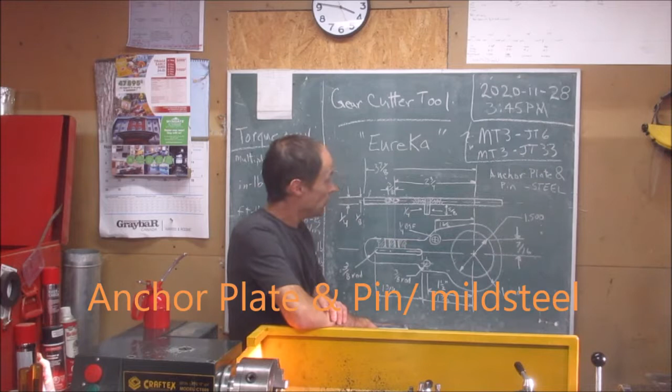Completed the ring, the retaining ring. Next is going to be the anchor plate and pin. They're made out of mild steel. Okay,

and this is a top view of this. Okay, and here there's going to be 2 set screws, right? And this is the pin, the pin steel, the pin, right here. And if you follow it down, it's right here.

Okay, it's a 1/4 inch in diameter, and it's 5/8 plus a 1/4. It's a press fit. Okay, so I'm probably either going to make it bang on or 1 thou interference fit, and then I'm going to press it in my press.

This is 1.5, and they got precision down to the thousandths of an inch on the picture. So this is going to be what the retainer ring we made is going to be holding in place against. In back here, you're going to see the ratcheting system with the 12 cogs on it, or the 12 notches. Okay?

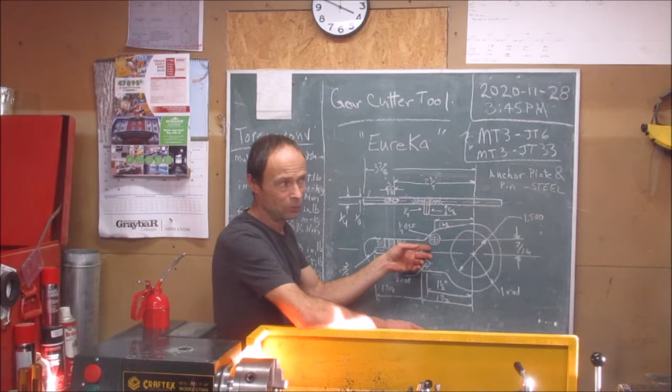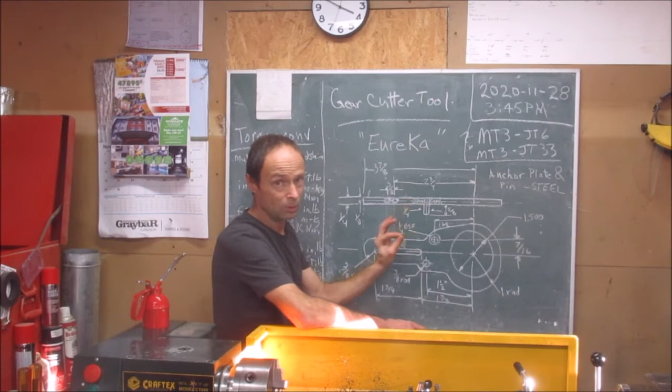Because fine gives you more gripping power, not necessarily stronger, but more gripping power, and more control over how much torque you would put. Like a 1/4 of a turn on a fine thread and a 1/4 of a turn on the coarse thread, you might be talking 10-20 thou difference of compression. So you're better off with a fine thread if you can do it.

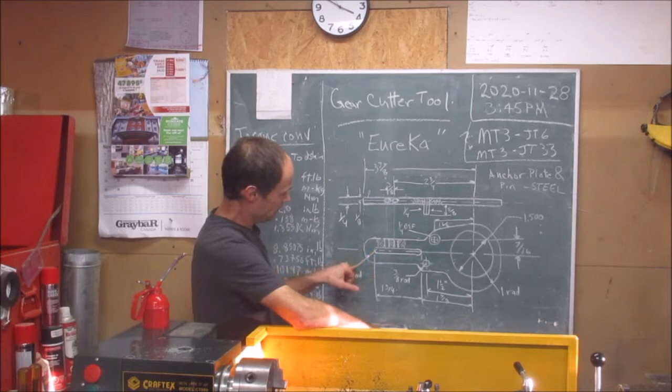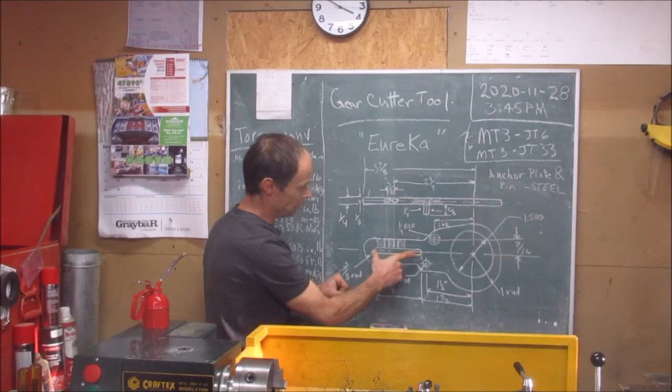This slot here, I don't have a measurement for it. I know that the radius from the center of that slot is 3/8. From the center of this, 1 7/8. To the pin, 1 1/2, and from the end of the 1 7/8, you have 1 3/4. That's the total length of that slot. But I have no idea what the width is. I'm going to check that out.

It's a 1/4 of an inch. Okay. So from here to here, one 1/4 of an inch. So let's get started.

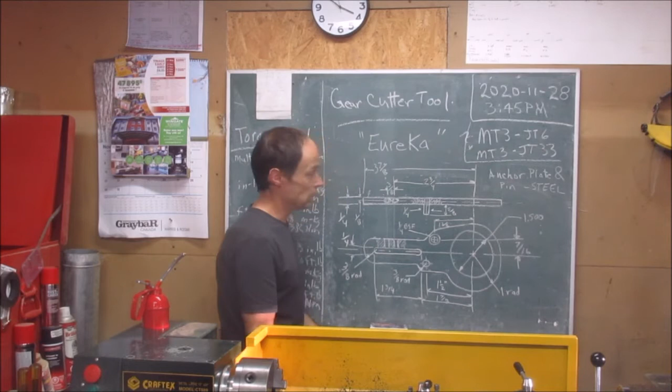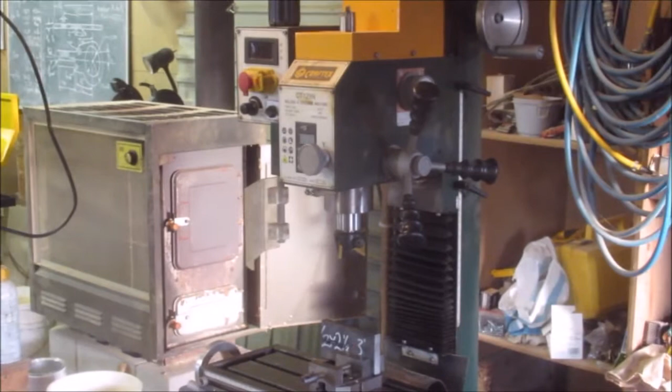So I've already cut from a piece of stock I had, which is 1/2 inch thick by 2 1/4. I cut that a little bit longer, around 5 inches long, but I have to take some off the height to bring it down to 2 inches, because my jaws on my vise only go up to 2 inches. That's the maximum they have, or 2 1/10. Okay, so I'm going to slice some off the top and some off the bottom. Then I'm going to be taking some off the thickness, bringing it down to 1/4 inch.

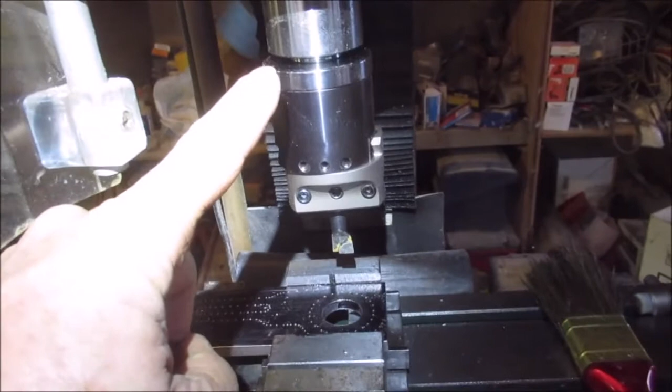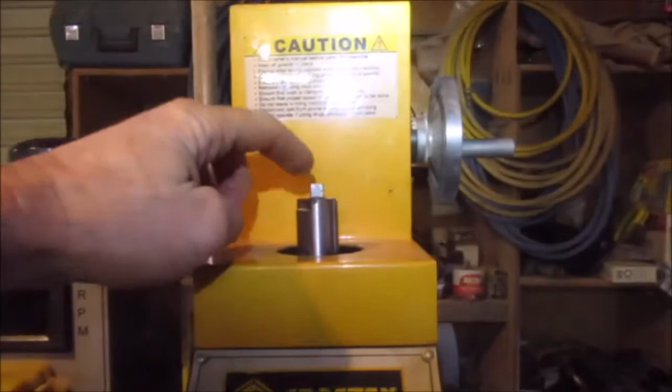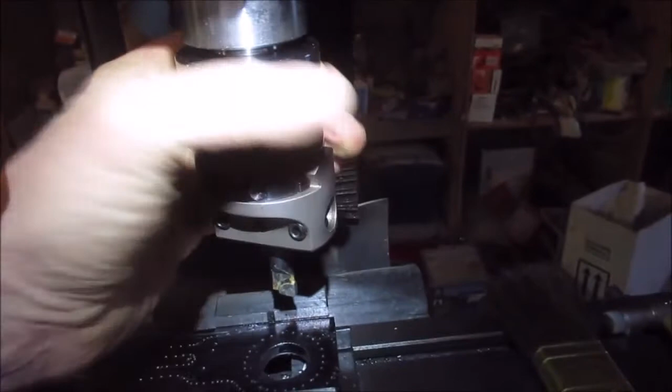So I finally got my boring bar in here, and the problem I was having was the drawbar would bottom out on top of the arbor before I could actually tighten up the drawbar. So I had to remove some material off the drawbar. I removed maybe 20 thousandths, a little bit more. It was just borderline, but it wasn't tight. At some points I could start spinning this around and the quill would stay still.

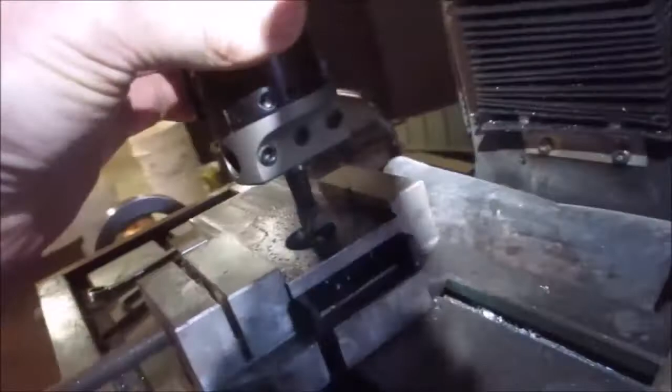Okay, so what you want to do is tighten these slightly. These actually control the slack in the dovetail. Your adjustment is over here, and it says 1 division is 1 thou. So if you lower your bar, like when I don't have a power feed on this machine, I'm gonna have to bring it down by hand on the micro adjustment.

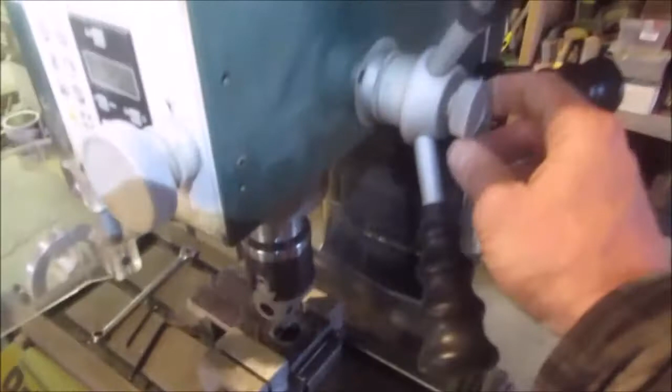And on this one, every division is 1/1000th of an inch. Same scenario. So you got to tighten this down, and I'm going to feed down to where I'm far enough, and then I'm just going to keep on tightening this screw till I actually get a scratch mark on the back side of this.

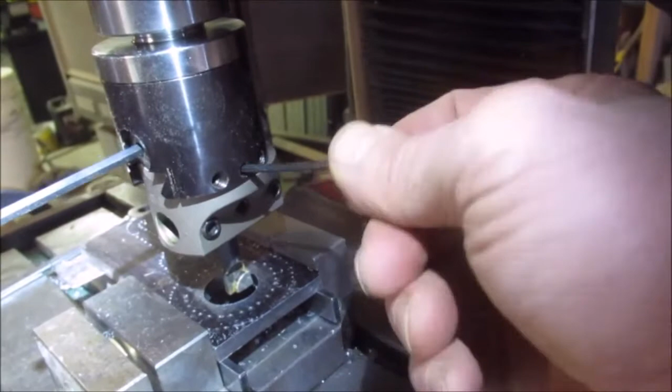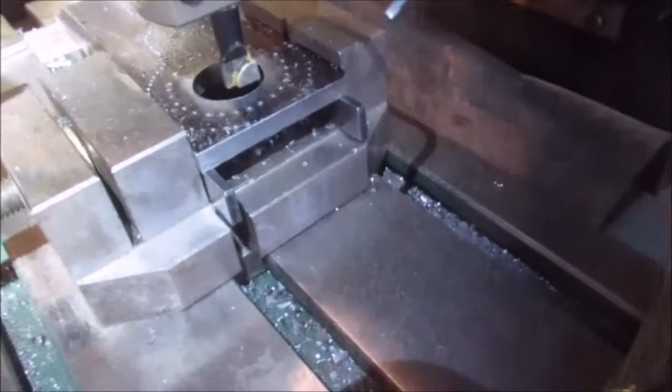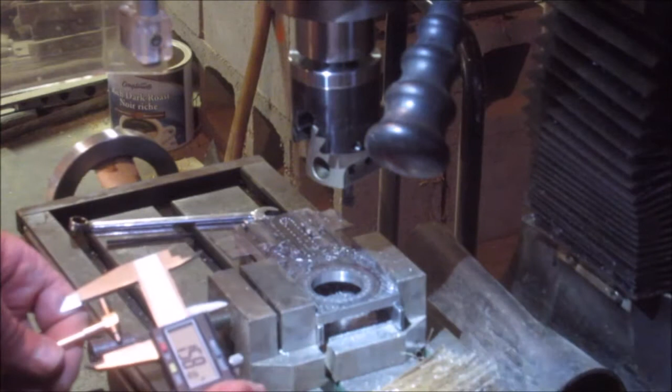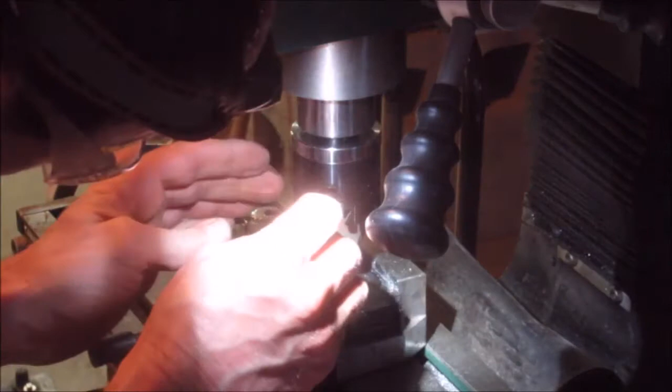I don't have a mic that does more than 1 inch, so I have to rely on this, which is not going to be as accurate. 2270. Repeatability 2270. 2270. Let's see what it does on 1 full turn. And I think I've already complete. No, I didn't do it yet. I didn't adjust it. Okay, let's take 1 full turn, which is approximately 50 thou.

If you don't let it chatter, it works well, but if it starts to chatter, you're either feeding too hard or

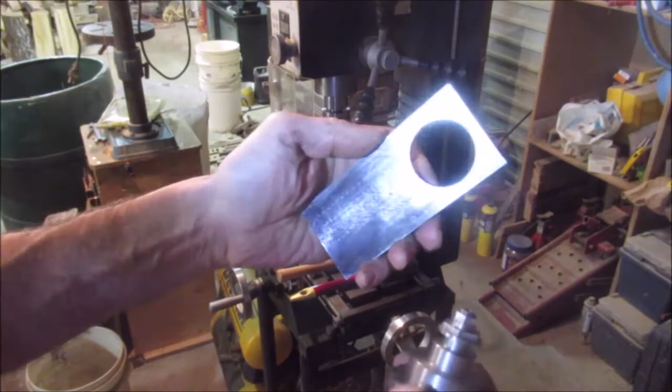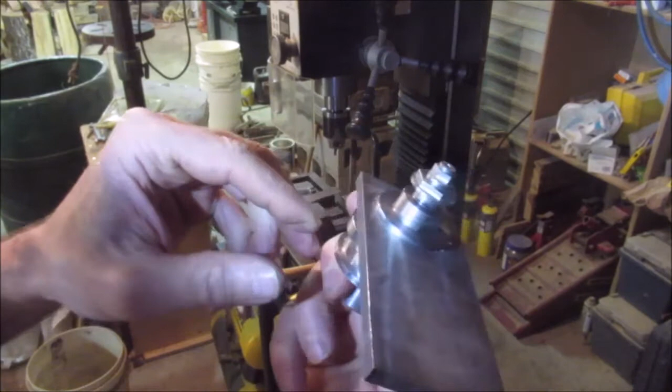And I took it out of the vise, and I regret it because the fit is so darn tight. I could have taken off another thou or two, but it's kind of hard to do. That thing is accurate. The boring head is accurate, but you got to be taking off at least like 4 to 5 thou, even 10 thou, but a spring pass, it doesn't dig in.

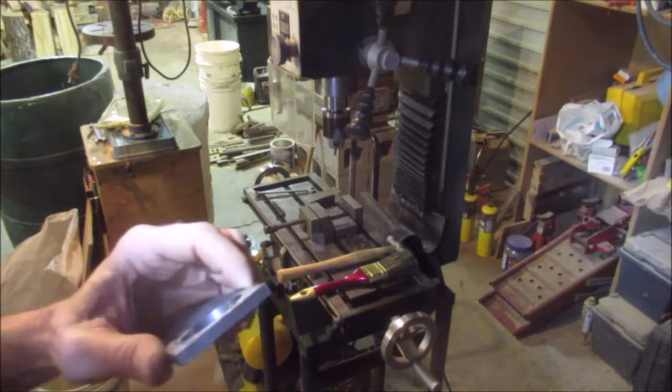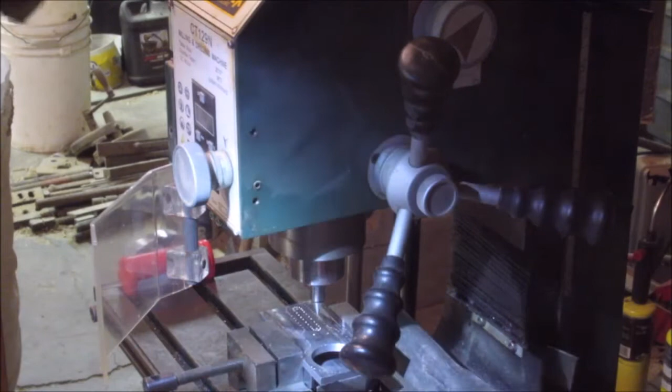So I'm left with hitting this with some sandpaper maybe. It might come around, but that is tight. Oh well. Sorry for the lighting.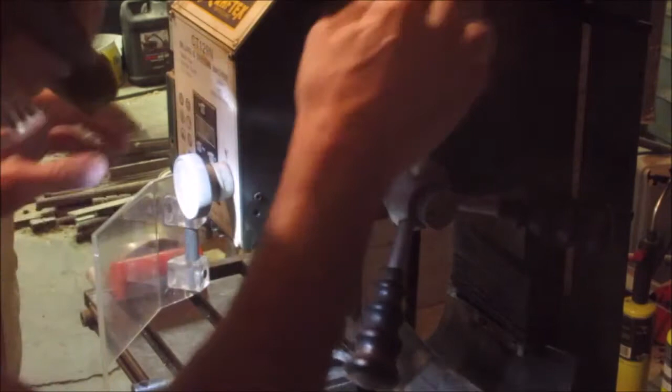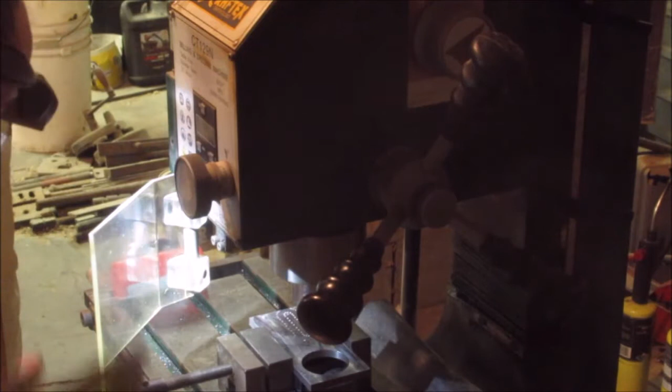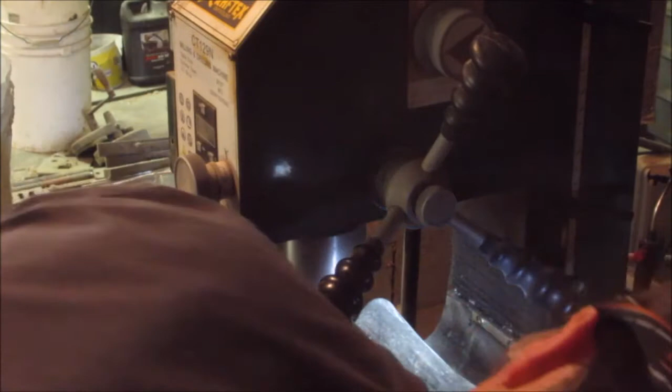I gotta put a 1/4-28 thread in there on that pinhole and that center punch that. Okay. Eyeball it first. Oh, right from the back of my head. I think I'm on it right there. I'm not sure.

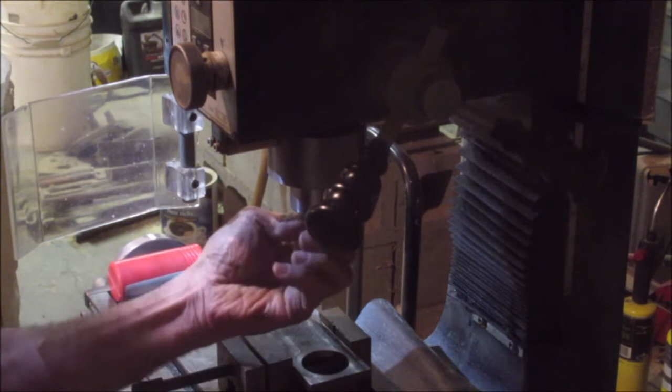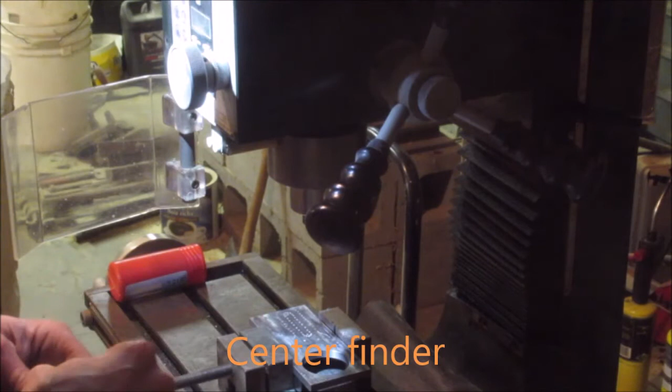Looks like it right there. Alrighty. Center punch, center drill it. Okay, remove this collet. Get a drill chuck.

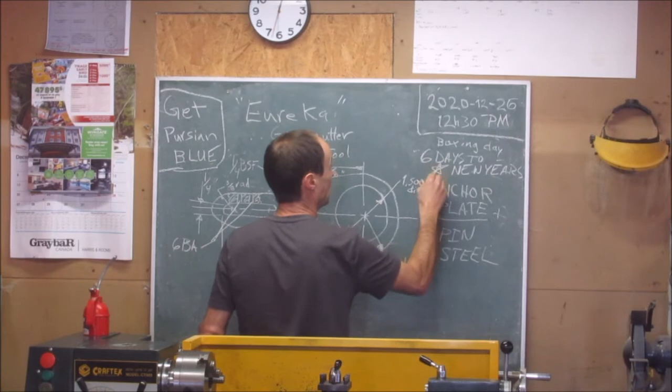December, 12:30 noon, and 6 days to New Year's.

Yesterday I actually got this and this done, okay, but I never got the holes put in here. And these holes are screws that actually hold down a little plate with a piece of what's supposed to be number 16 piano wire, but it's going to be number 15. That's all I could find. There's 1 thou or 2 thou difference. So how much is that going to affect spring action? Probably not a whole lot.

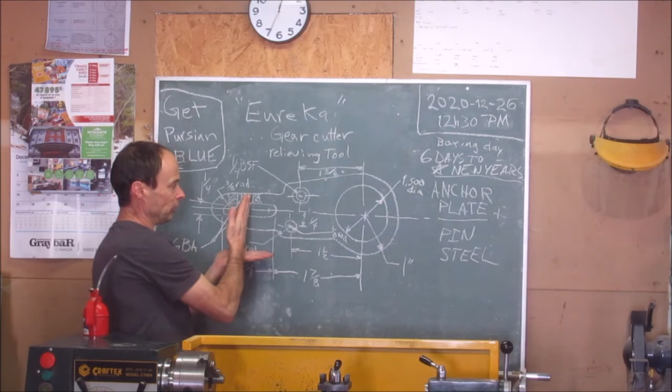And yeah, today I'm going to mill this flat or take a chunk out of it with a hand grinder. Do the same thing here, and I'm going to leave the one in the bottom so I have a reference for these holes. And once they're done, I'm going to cut out the bottom part. Okay, so you have to do that in that order. If the bottom's still on there, I have a perpendicular plane to put these holes in, and they're threaded, right? Okay, so let's get started.

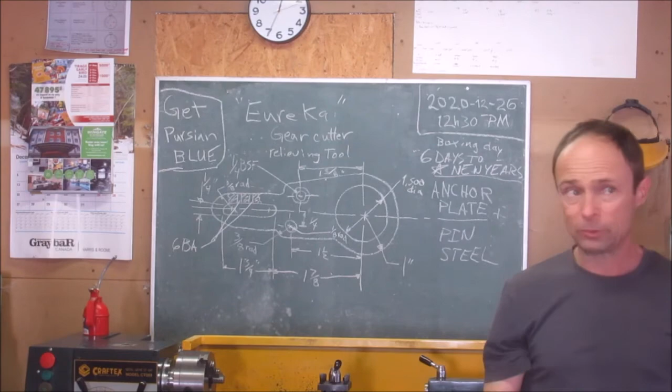Oh, I'm going to be charging my battery, so I don't know how much footage I'm going to get of this.

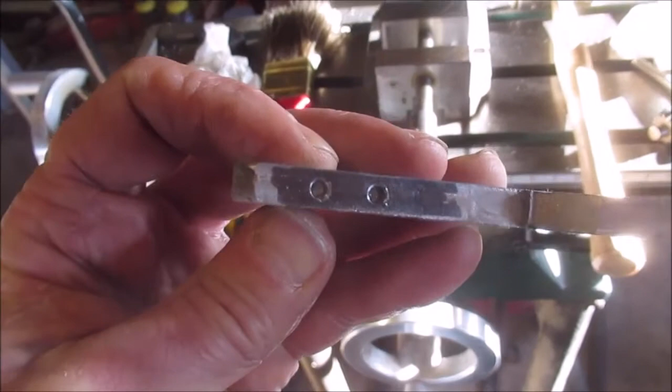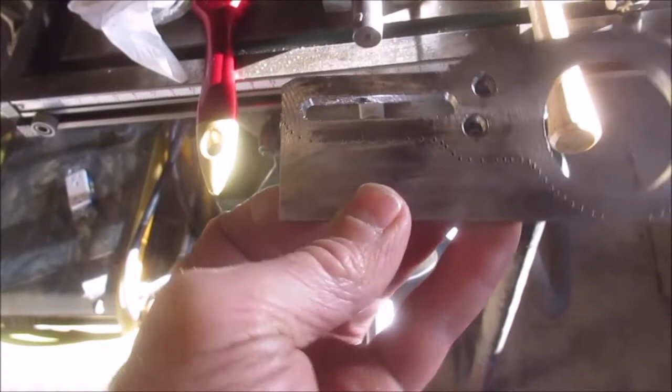Well, this is it so far. And I've drilled these 2 holes. I've made them number 6s. And, oh, I flattened out this part. I was sure that I scribed this from this surface up. Right, and when I put this in my vise, I'm not aware that my vise is anything but square, but yet this end where my finger is seems thinner than this side, so something wasn't square. That's all there is to it.

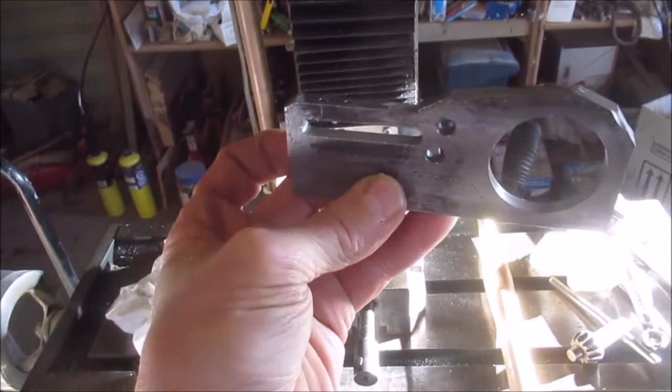So when I put it like this, maybe it was tilting. Or maybe it wasn't, you know. Or it had to be. It had to be tilting. Or unless I'm off in this direction, which is probably the case. I'm going to check that for square.

But instead of making them 6 British Association threads, 6BA, they are number 6s, and they are National Coarse 32. A 6BA is 110 thousandths OD, major diameter. And a number 6 standard thread is 138 thousandths. So obviously, as you can tell, the guy who made the plans for this was a British tool maker.